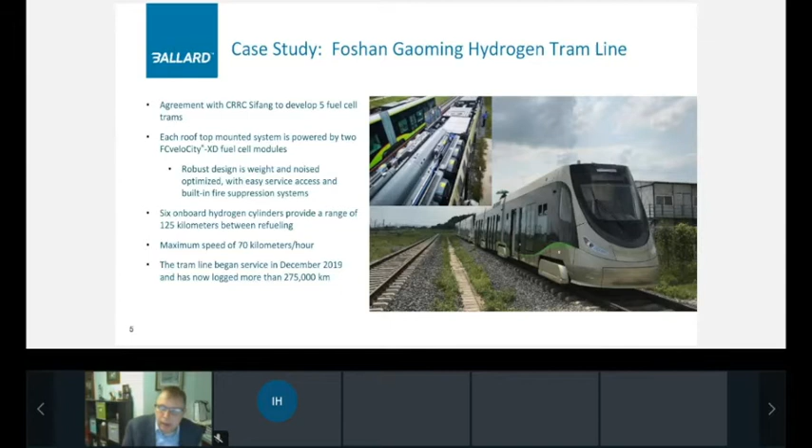On a slightly different path, whereas the Foshan trains were taking our standard products, with Siemens we worked on a multi-year development project where we developed a very specific module dedicated to the new Siemens Mireo regional train. These systems, each of which is 200 kilowatts, utilize Ballard's latest fuel cell technology and are capable of -25 true cold start, and incorporate all of the rail standards. This is now the standard offering for Siemens in their Mireo fuel cell powered trains.

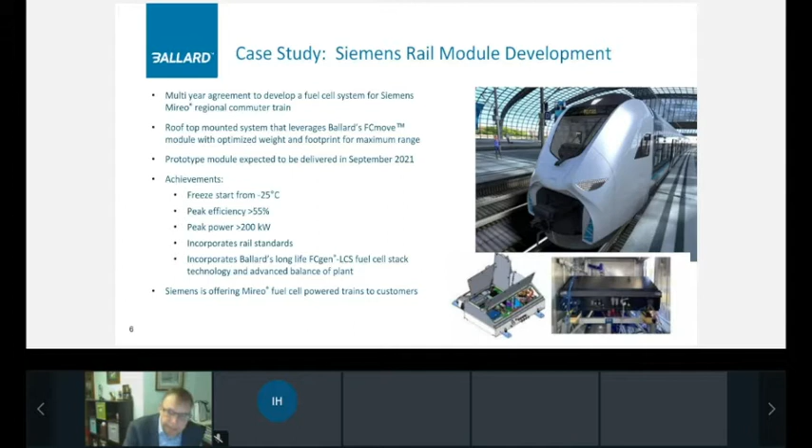And the last project I want to share is one where we're extremely pleased to be supplying 1.2 megawatts worth of fuel cells to Canadian Pacific for a line haul locomotive that will be running in the Calgary-Edmonton corridor. These modules also utilize our latest fuel cell technology, and we are looking forward to this train being operational next year.

Now I have Kyle Mulligan speaking right after me, so I don't want to steal all of his thunder - he'll go into much more detail on this project. Okay, thank you so much.

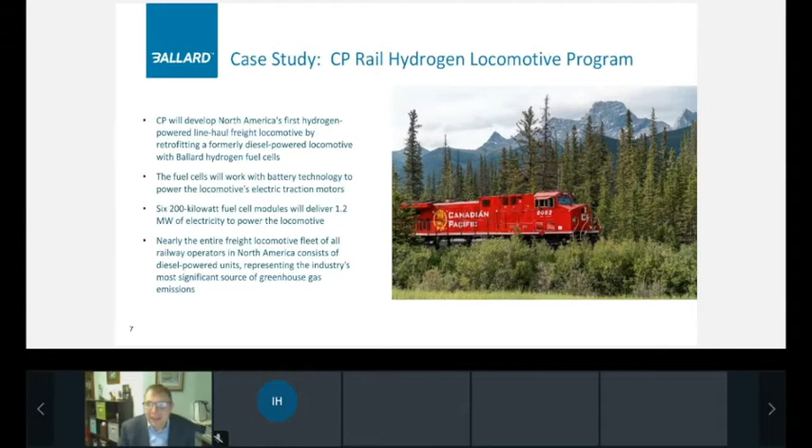Okay, thank you. Thank you very much, Terry. My name is Kyle Mulligan. I'm the Chief Engineer at Canadian Pacific.

Before I jump into my presentation, I wanted to share who we are at Canadian Pacific. We are a coast-to-coast railway based primarily in Canada, and we operate in the United States. We have over 12,000 employees.

We operate 1,200 locomotives across 13,000 miles of track. As I mentioned, my name's Kyle Mulligan, I'm the Chief Engineer. I lead a team of 20 railroaders here at CP, and we call them railroaders because not only do they have the academic credentials to form a solid technical staff, they're also qualified conductors, locomotive engineers, rail car and diesel mechanics, welders, locomotive and car inspectors, and engineering rules qualified.

So what that allows them to do is really combine that field expertise that they get through regular deployments into our operation and bring that back with their technical skills to solve real railroad problems. So targeted initiatives as opposed to big bang initiatives that aren't adding value.

Through the railway technology team, we find ourselves really at the center of operations, mechanical, and engineering, and we report to the associated senior vice president of those departments. We use our IS department to implement our concept ideas all the way to realization, and then we play a role in supporting our network service center, so customer support, and our sales and marketing team.

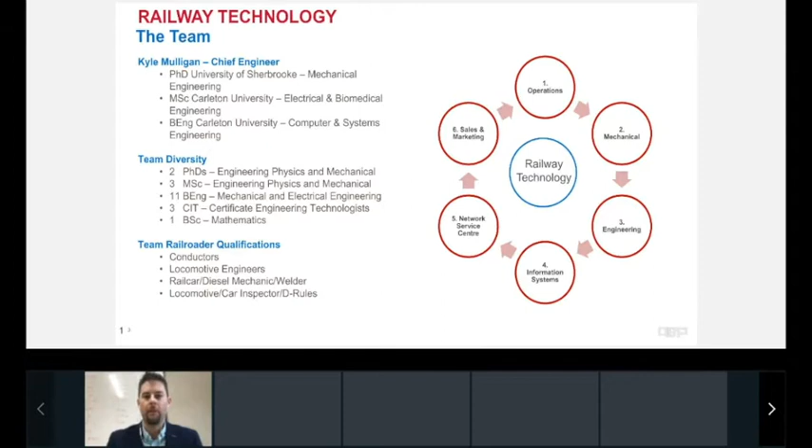In addition to what I'm going to talk about today, we do a lot in our team, starting with our wayside detector network — a number of detectors located beside the tracks, looking at bearing, wheel, brakes, all kinds of different aspects of every freight car and locomotive passing at track speed. We also do train dynamics and incident investigations through simulation technology, where we use the inputs from our detectors to recreate events and solve rail problems, but also optimize train designs and configurations.

That leads into our advanced analytics and strategic technologies, so data mining and machine learning. We also have a 1,300 square foot lab where we can do metallurgical and laboratory analysis — we can cut rails, cut wheels, look at them under the microscope and so on. That allows us to validate a lot of our design assumptions.

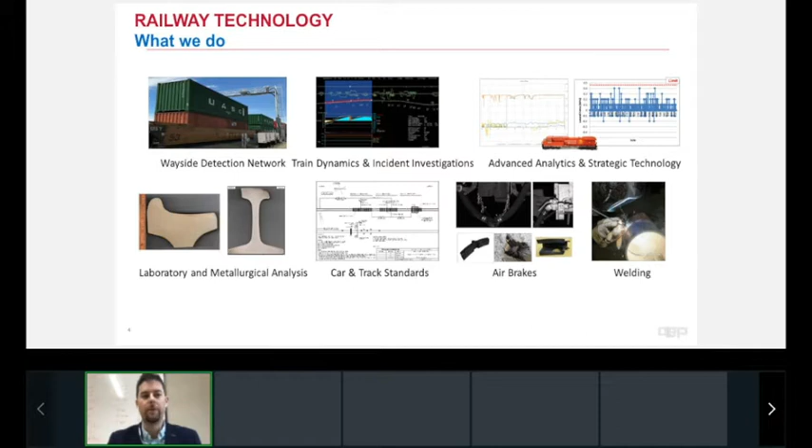All of this to say our main goal is to drive improved car and track standards. And if that's not enough, we look at air brakes and welding as well. So we have diversity in terms of what we do from a technical perspective, and we're really that strategic railway technology team that focuses on operational problems.

In terms of our business mix at CP, we're primarily a bulk franchise, and we move those commodities across the border, ranging from energy, chemicals, and plastics, all the way to grain, forestry products, and potash. Some of those commodities also come from the United States back into Canada, and of course we run all the way down to Mexico as well. So we cover truly the North American rail spectrum.

Over the past decade, we've had initiatives to become the most sustainably driven railway in North America, starting with our head office campus. This used to be a rail terminal located in Ogden, Alberta, and you can see that it's been refreshed and rejuvenated to create the ultimate head office.

In addition to the campus, located just behind that building is a 5 megawatt solar farm, so we're drawing power from solar energy to power our campus. And we're pushing that envelope further, and that's really what I'm going to talk about today — our zero emission locomotive technology in partnership with Ballard.

So our CPH2 program — first of all, starting off with why us? Well, we've aligned ourselves from a board perspective, and with the investment community, around our ESG goals. So we want to truly not just call ourselves sustainably driven, we want to be sustainably driven.

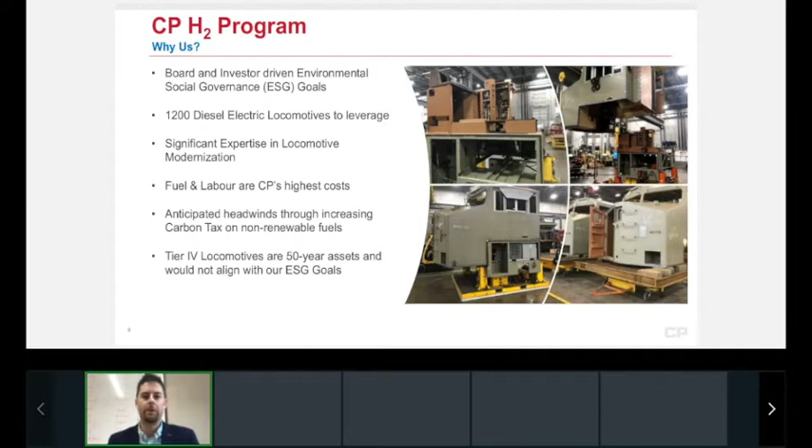So what we're trying to do is leverage our modernization strategy and incorporate zero emissions technologies so that we can build a zero emission platform.

Traditionally at Canadian Pacific, we have a history of going against the grain and moving the industry to places it hasn't moved, or as quickly as we've wanted, from the steam era to the diesel electric era, and now more recently to the zero emission locomotive era. We're very proud at CP, and that's one of our values we're trying to push for the industry.

So why locomotives, and what makes them good platforms? Well, they're already hybrids—electric traction motors powered by a diesel engine through an alternator. If you remove that diesel engine and alternator and replace it with zero emission technologies, you already have a platform that can leverage those electric inputs to provide traction.

If you look at the image on the slide, I've highlighted below with a green outline the specific areas we're targeting to replace, and what we're doing is replacing them with what you see above.

Where the diesel fuel tank was, we have a traction battery system. Where the cooling system and rad fans are, we have our H2 storage. And where our diesel engine and alternator were, that's where we place our fuel cells. Then we have a newer electrical locker.

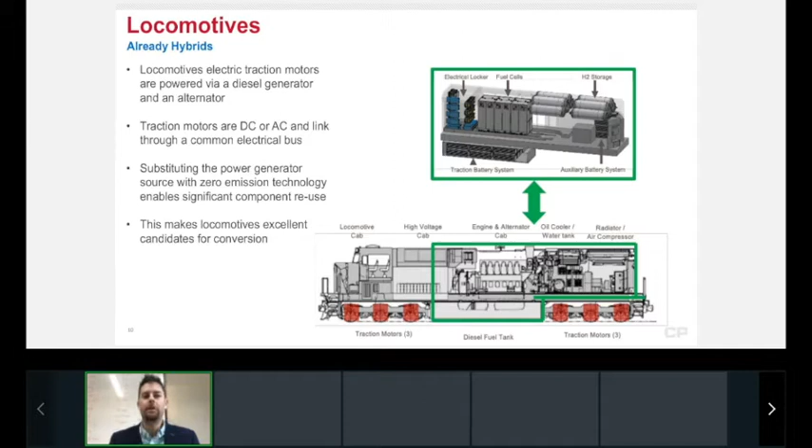We're truly building this in a way that it's modular, such that we can retrofit existing platforms. So where are we at? Terry alluded to wanting to get a locomotive moving by next year.

In fact, today is our first movement test of the locomotive. By the end of this year, we'll have a moving prototype, and then we're going to deploy that prototype into one of our terminals in Calgary. We'll do switching testing, and eventually move it onto the road, onto a subdivision, to continue testing throughout our network.

So just to highlight what we're doing in this program, we've essentially moved from nothing in Q4 of 2020 to a full moving prototype by Q4 of 2021.

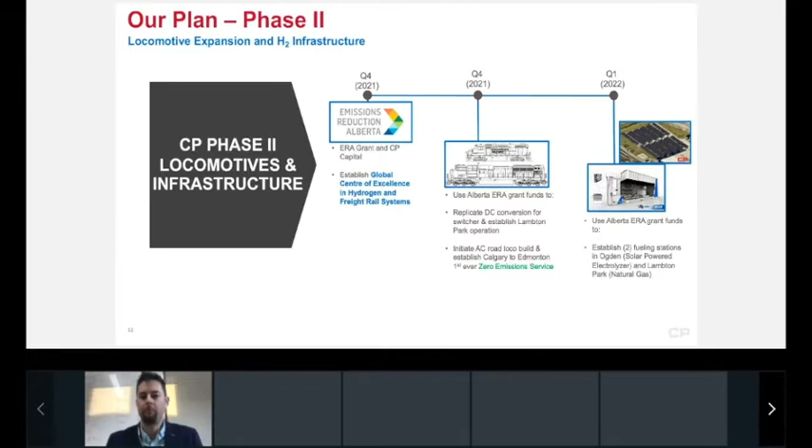So our next year's order is going to give us twice the capacity. And so we fundamentally believe with these continued improvements and optimizations through what we're going to be doing over the next couple of years, in parallel with the capability of producing small-scale hydrogen production portable facilities, we'll be able to achieve an efficient operating plan.

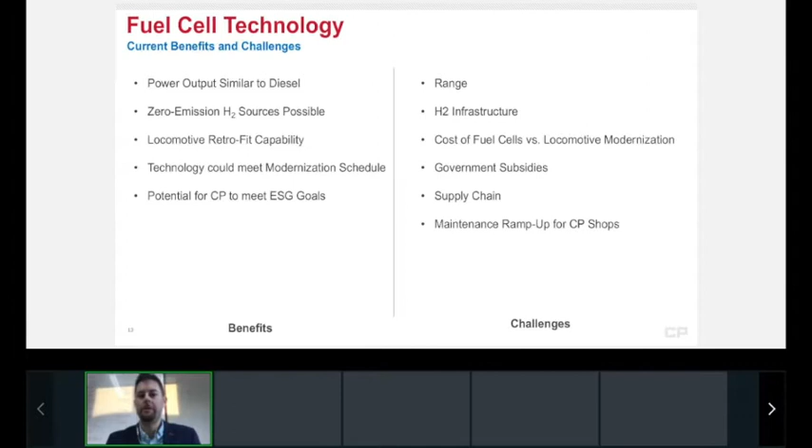But again, with our partners and our suppliers, we're working to create certain types of links that will enable us to do a lot of the maintenance ourselves internally. So overall, that was just a quick overview of our CP hydrogen locomotive program. Thank you.

Thank you so much, Kyle. That was fantastic. And as a fellow Calgary resident, it just gets me more excited to see what's on the horizon.

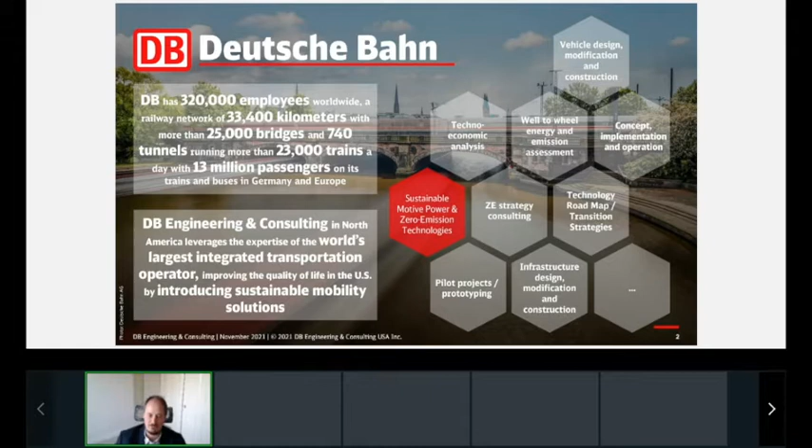My colleague at CP just mentioned two options. But now I'll get a little bit into the history and how DB has been involved with this technology. And for the Canadian audience, you'll probably really enjoy this: the very first hydrogen-powered rail vehicle in the world actually operated in Canada.

Shortly after that, the International Hydrail Conference series and initiative started, and that's still ongoing. It's an annual event where people and experts with interest from policymakers, industry, and academia come together to talk about hydrail expertise.

For that BNSF locomotive, I personally did the emission assessment and the supply chain assessment for that particular project. I'm not going to go through all of these, as I don't have enough time.

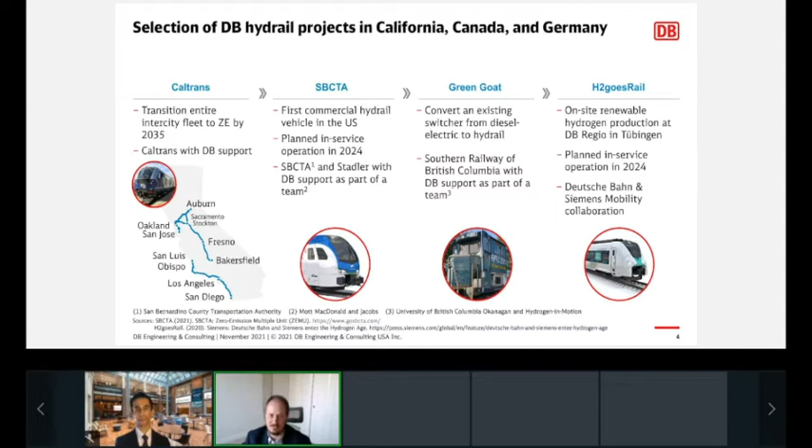The Green Goat project with the Southern Railway of British Columbia. I already mentioned the conversion and the H2 Goes Rail project in Germany in collaboration with Siemens. Renewable hydrogen production through electrolysis is planned for in-service operation in 2024, as part of our collaboration.

Here, I'm not going to talk to that a lot. This is my last slide, just watching time here. Where are the different zero emission technologies actually suitable for the different services? We split them into all of the different main passenger services, as well as the different freight services. What we already have commercially available across all of them is current wayside electrification.

So either overhead, which is what we typically see, or third rail. It works really well, it's zero emission at the point of use. The biggest problem is it's extremely capital intensive, and with that we need alternatives. Batteries will work in several different applications, particularly if you combine them with partial electrification. We have some of these trains operating on our network in Germany, for example, but a lot of the network is already electrified, so that makes sense. But for some other applications, it's not that useful.

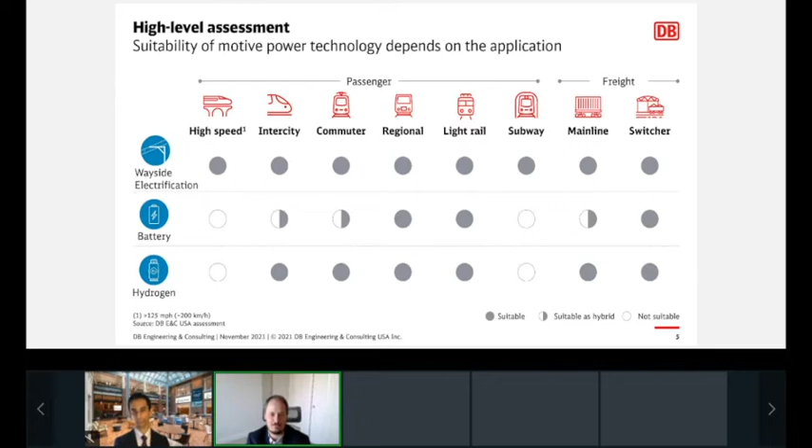The half circle indicates where you might do a hybrid, so you have batteries and another power source. Most of these hydrogen trains, for example, are hybrids — they have hydrogen fuel cells plus batteries, or some other sort of energy storage. And then at the bottom, hydrogen vehicles — you can see they're suitable for almost all rail services, with a few exceptions currently. Thank you very much.